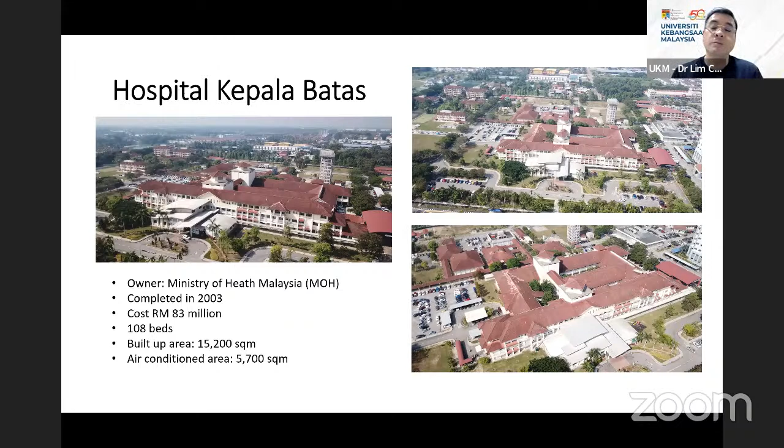The hospital can accommodate 108 beds, with a total floor area of 15,200 and an air-conditioned area of 5,700 square meters. The majority of hospitals in Malaysia are naturally ventilated. Of course, they have certain air-conditioned areas, but mostly for the clinics and offices. Most of the hospital wards are naturally ventilated.

The main objective of this research is to identify the state of thermal comfort in the naturally ventilated government hospital. Secondly, to evaluate the improvement in thermal comfort with the proposed roof insulation, which we call a radiant barrier, and to introduce the PVT hybrid heat pump cooling system to improve thermal comfort. Thirdly, to analyze and optimize the performance and operation of the PVT hybrid heat pump cooling system through field studies.

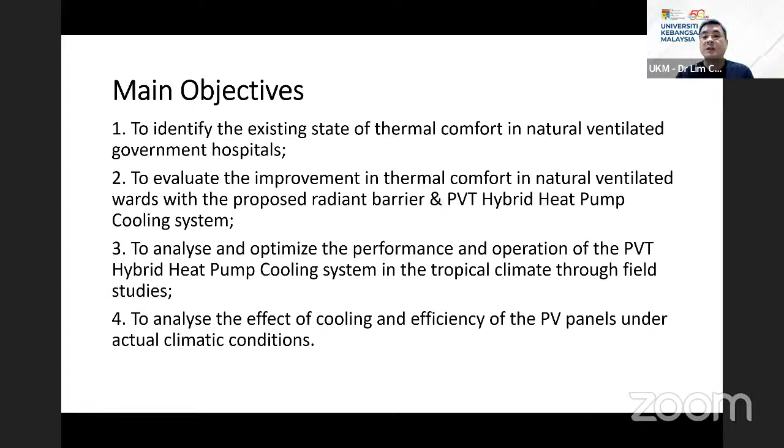And fourthly, to analyze the cooling effect and the efficiency of panels under the Malaysian local climate condition. So this is the framework of the pilot project. We first undertake the baseline, then design the PVT heat pump system, install, test and commission, and monitor and optimize the system and record the research documentation.

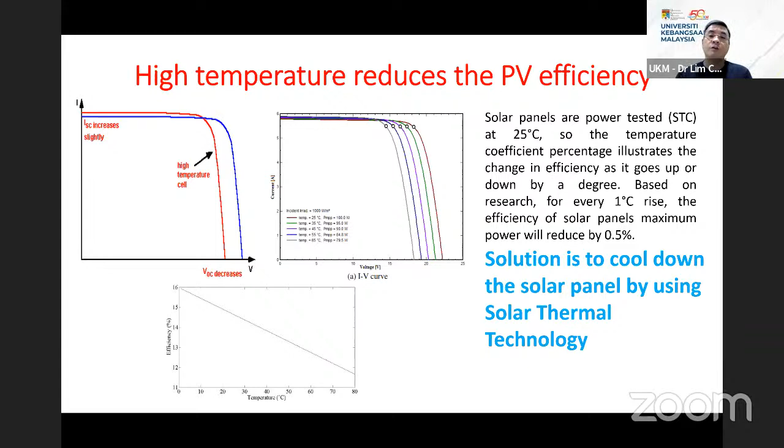The following slide shows the concept of the photovoltaic thermal. The intention of the photovoltaic thermal is to improve the efficiency of the photovoltaic panel. As you can see, if you can cool down the panel, it can improve the power efficiency of the solar panel. Based on research, every rise of 1 degree in the solar panel can reduce the efficiency by 0.5%. So if you can improve the cooling of the solar panel, you can also improve its efficiency.

So the PVT concept combines the conventional solar panel with the thermal collector. If you have a thermal collector of 60% and a solar panel of 18% efficiency, you can add them together and divide by 2, which is 39% efficiency. So you get a higher efficiency by combining the thermal collectors and the photovoltaic panels.

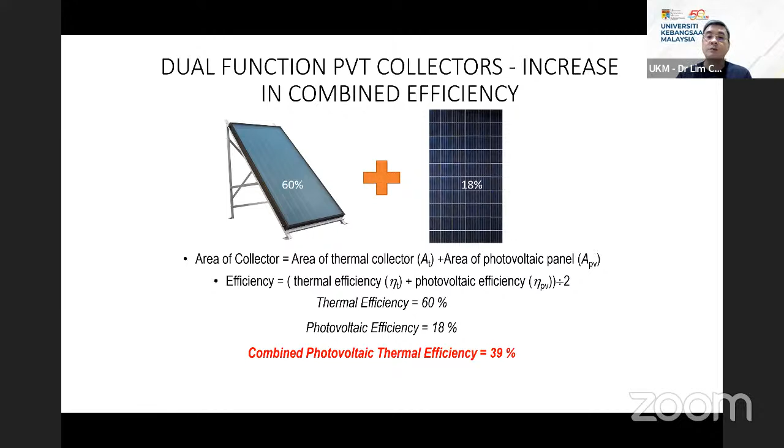So fins have been integrated into the photovoltaic panel by creating something like a channel that allows the air to flow through. The fins are something like your engine fins. If you've seen motorcycle parts, you can see the fins, which are air cooled, that enable the solar panel to cool down further by using the airflow.

There is research published by this researcher in the Case Studies in Thermal Engineering journal. They claim the panel efficiency can improve from 9.81% without cooling to 11.2% with the cooling fins. So it's quite effective. This slide shows the fins incorporated into a conventional photovoltaic panel. You have a panel of 1 meter by around 2 meters in length, and the fins are installed as a heat sink underneath the panel.

You can see the photo on your right hand side as well. You can see the fins have been installed onto the back side of the solar panel, so it acts like a heat sink.

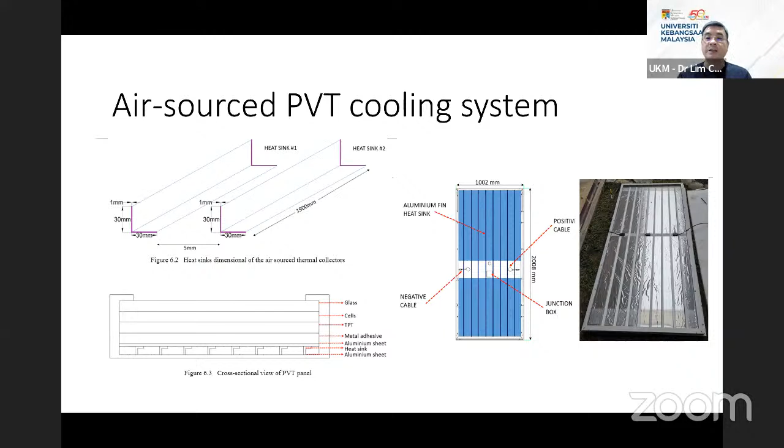Okay, so this is the diagram of the photovoltaic thermal hybrid heat pump cooling system. This chart is showing you the PVT, the photovoltaic thermal. And then this is the cooling ward, and then you have a heat pump here. So the air is channeled to the photovoltaic panel, cooling the panel, and then the hot air will be discharged and goes back into the heat pump.

The cool air is generated through the heat pump and then channeled into the cooling ward. At the same time, the heat pump will produce hot water. The hot water will then be channeled into a hot water tank, which is around 600 liters, and then the hot water can be supplied to the application of the hospital. The other way, the cold water can come in as well and be channeled into the heat pump. So this is the whole entire PVT hybrid heat pump cooling system.

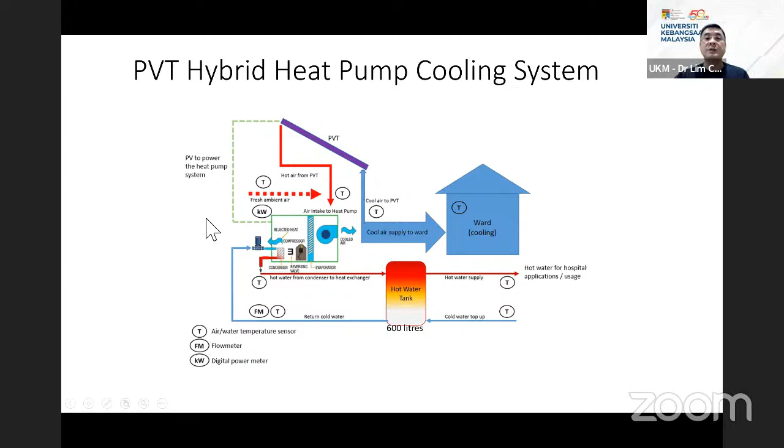The heat pump is an air source heat pump that we are using. It has a cooling capacity of 16.5 kilowatt, which is 4.7 ton, with a COP of 4, which is quite efficient.

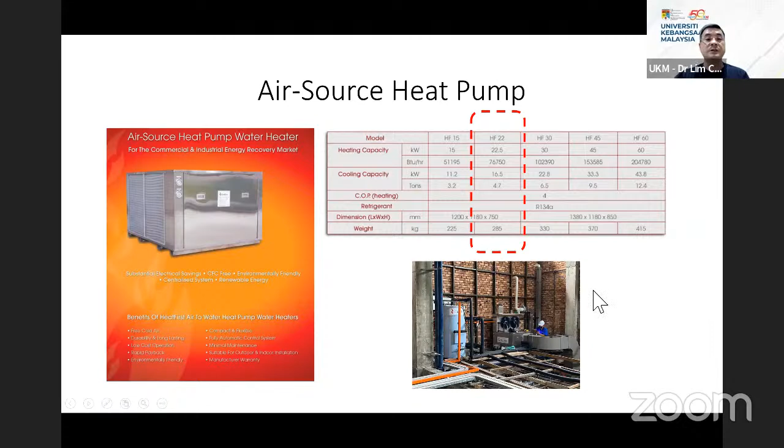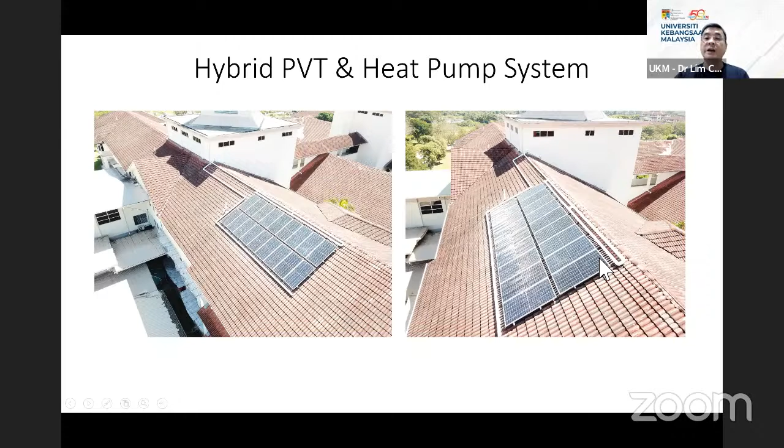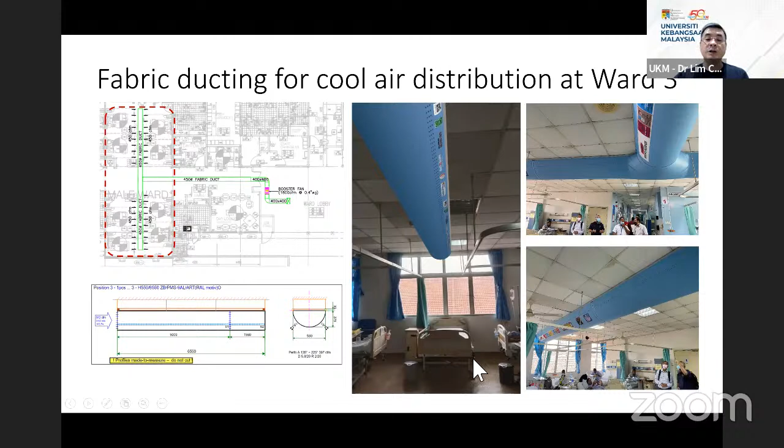We are using the fabric duct that has been installed and runs across the hospital ward, and this fabric duct discharges the cool air into the ward environment. The photovoltaic panels that we use for this project are 8 kilowatt solar panels manufactured by Jinko Solar. Jinko Solar is one of our collaborators in this research.

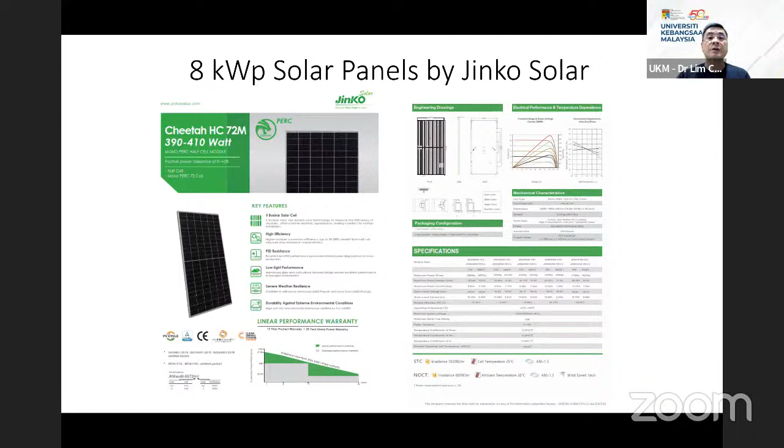A bit on the fundamentals of the thermal comfort study. Thermal comfort is based on 6 parameters, under the standard ASHRAE 55 thermal sensation. The 6 parameters are the airspeed, the air temperature, the radiant temperature, the metabolic rate, the clothing insulation, and the humidity. All these parameters influence human comfort.

For the thermal sensation, if you look at the chart on your right hand side, 0 is neutral, +3 is hot and -3 is cold. So this is the gauge for the thermal comfort, based on the studies.

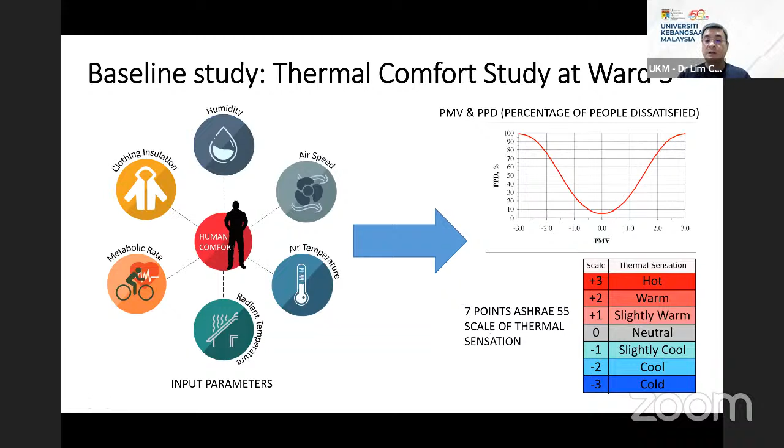This slide shows the equipment that we use to study the baseline thermal comfort. This is the thermal microclimate instrument that we fixed in the hospital ward. It can measure the air velocity, the mean radiant temperature, the air temperature, and humidity. The instrument can also plot out the thermal comfort range. This is a picture of us fixing the instrument in the hospital ward.

Okay, this is a picture of the doctors that are also in charge of these hospitals, and the researchers as well.

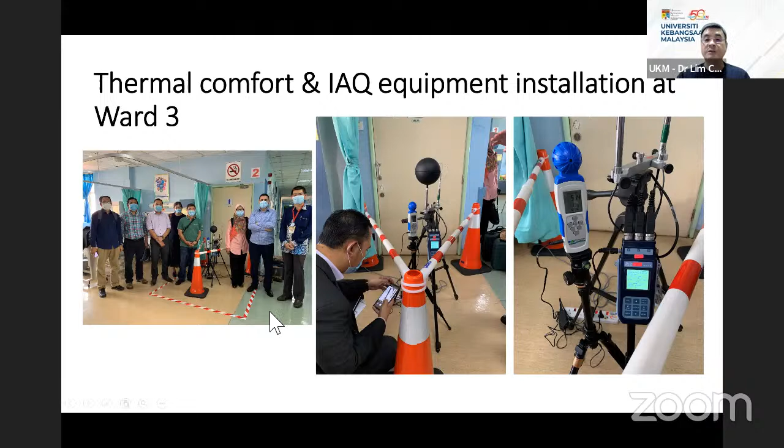Another instrument that we fixed is for the indoor air quality study. This is a TVOC, or Total Volatile Organic Compound measurement instrument, to measure the total volatile organic compounds of the hospital ward. This is also quite important to see how the indoor air quality of the ward is.

The TVOC levels that we measure have a range: 0 to 14 ppm is low pollution, 15 to 34 ppm is moderate pollution, and 35 to 50 is high pollution. There are 5 main gases measured by the equipment: toluene, ammonia, ethanol, H2S, and hydrogen.

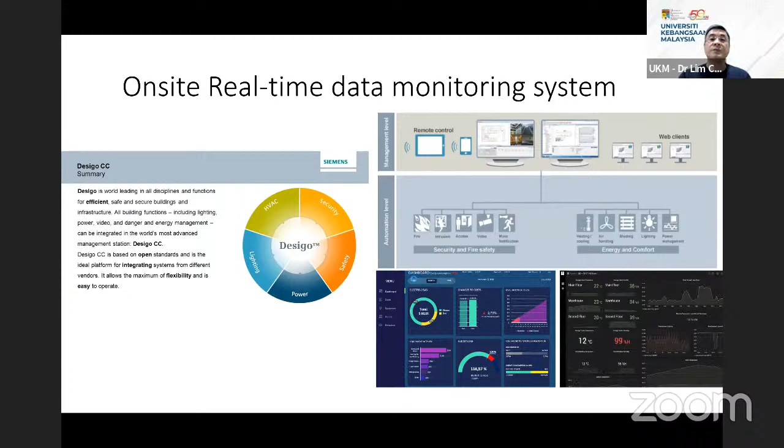We also monitor all the data collected and channel it into a real-time monitoring system. This system we installed is a Siemens system called Desigo CC. You're able to monitor the performance of the ward. This is a photo of the sensors, and the monitoring is connected to a PC on site. The sensor is fixed on top of the ceiling, and we also have a climate measurement for temperature and humidity.

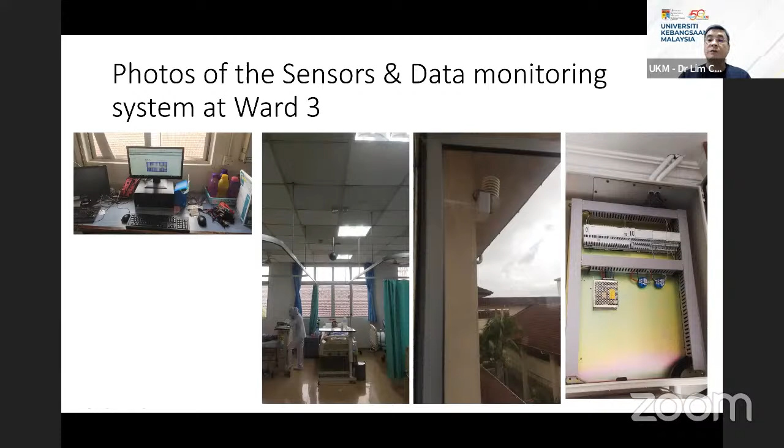The next slide I will show is the baseline existing thermal comfort and air quality condition at Ward 3.

This graph shows the condition of the indoor ambient temperature versus the humidity. You can see that the temperature increases and the RH drops around 9 a.m. and remain at 60% until 5 p.m. The lowest RH is from 1 p.m. to 5 p.m. Average RH we found is around 75%. The highest temperature is 32 degrees around 4 p.m., and the lowest is 27 degrees early in the morning. So this is the condition of the ambient temperature and RH.

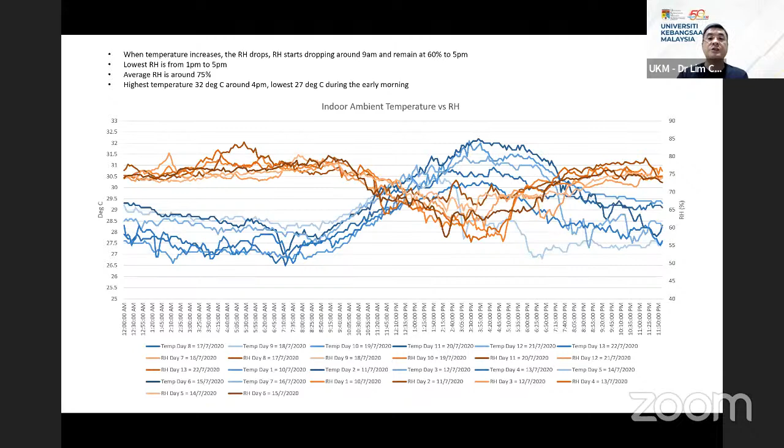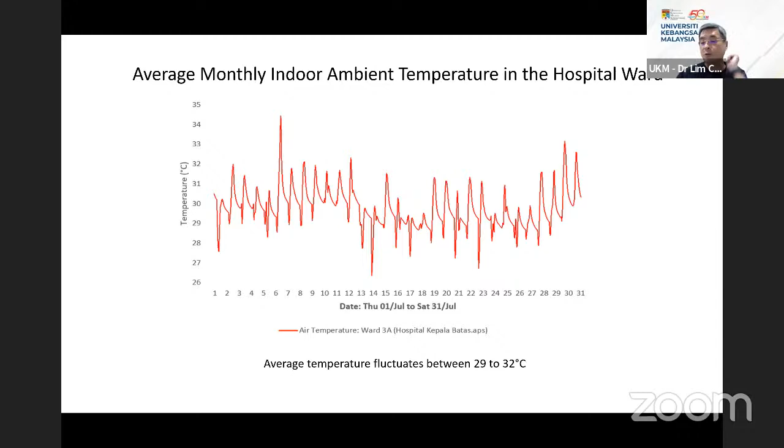This is the graph showing the average indoor ambient temperature. It fluctuates between 29 to 32 degrees Celsius, so it's quite a warm indoor environment.

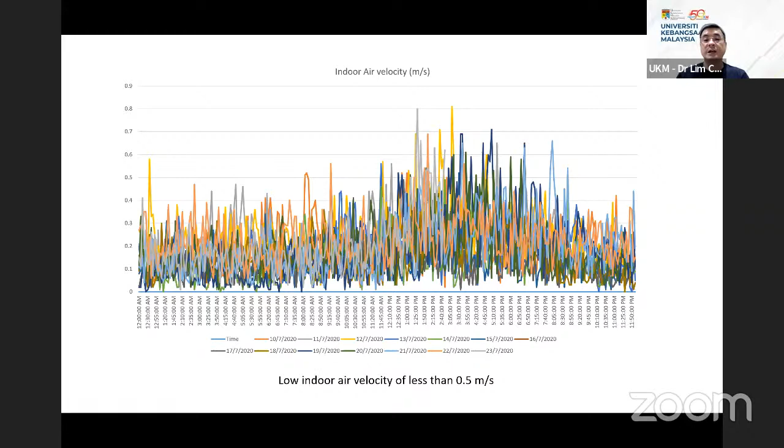This is the graph showing the indoor air velocity that we have taken through the hospital ward. You can see that most of the airflow is quite low, less than 0.5 meters per second.

This graph shows the PMV, or predicted mean vote, which is the thermal comfort. It ranges between 1 to 2.5. So if it's 1 to 2.5, it shows that it's on the warm side. This is based on a MET of 1.15 and a clothing index of 0.7.

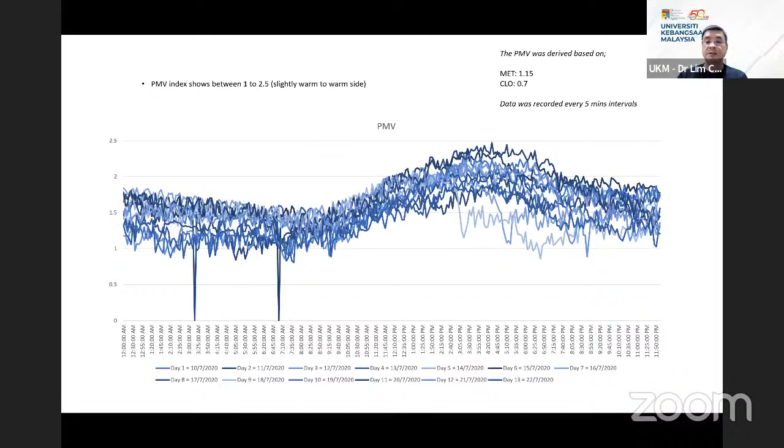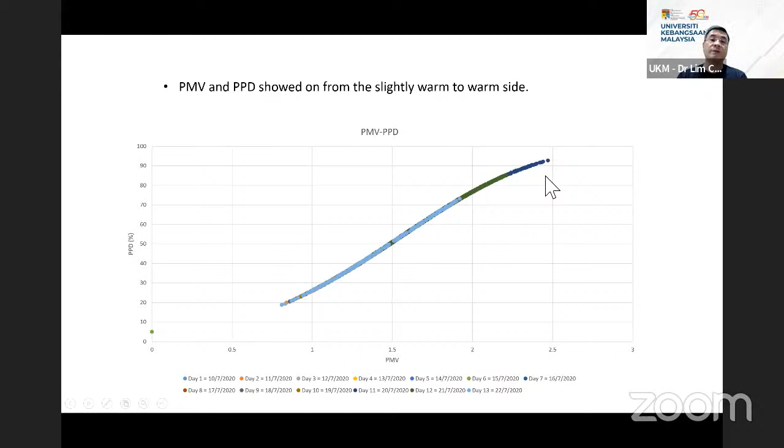The data is recorded every 5 minute interval. This graph shows the plot of PMV versus PPD. PMV is the predicted mean vote, and PPD is the percentage of people dissatisfied. You can see that it's on the warm side. 0 is neutral, 1 is already warm, and it goes up to almost 2.5, which is quite uncomfortable for the patients. This is the average mean of the PMV and PPD, showing it's between 1.3 to 2.2.

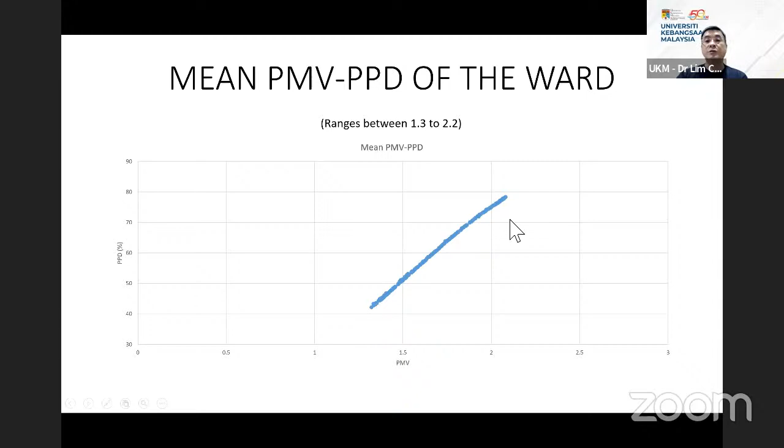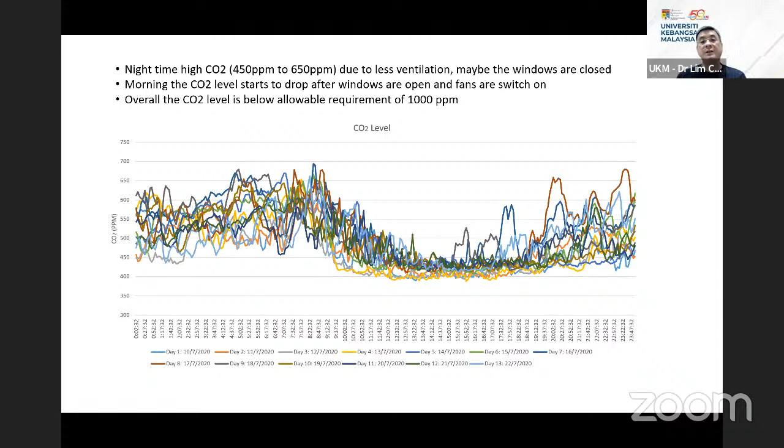On the CO2 level that we also measured, the nighttime CO2 level is between 450 ppm to 650 ppm. This is mostly due to the windows being closed during the night, because the nurses close the windows, so there's no fresh air coming in and the CO2 level increases. But in the morning, the CO2 level drops because the windows are opened and the fans are switched on, so CO2 drops to almost 400. Overall, the CO2 level is still acceptable, still below 1000 ppm, which is the safety level.

Besides that, we also did a survey on the ward occupants, covering patients, visitors, nurses, doctors, and hospital workers, to see what the perception of these occupants in the ward is.

The results from the survey at the ward: we have patients around 24% who answered, visitors 12%, nurses 52%, doctors 8%, and hospital workers 4%, making up the total respondents of the survey. We found out that 85.2% of the people in the ward felt warm to hot, which is not so healthy.

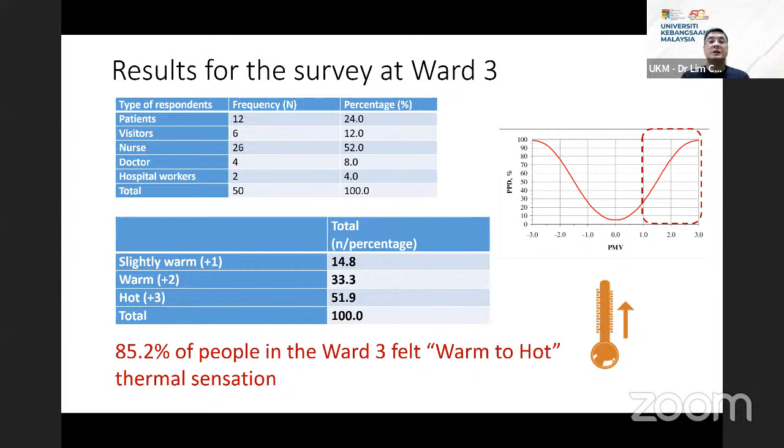So we decided to install the hybrid PVT system and heat pump for this naturally ventilated ward to improve the thermal comfort.

Okay, so this graph shows before and after the installation of the hybrid system. The blue line is without the system, and the orange one is after we install the system. So we have an improvement of 2 to 3 degrees Celsius in temperature. It's a significant improvement after fixing the system to cool down the hospital ventilated ward.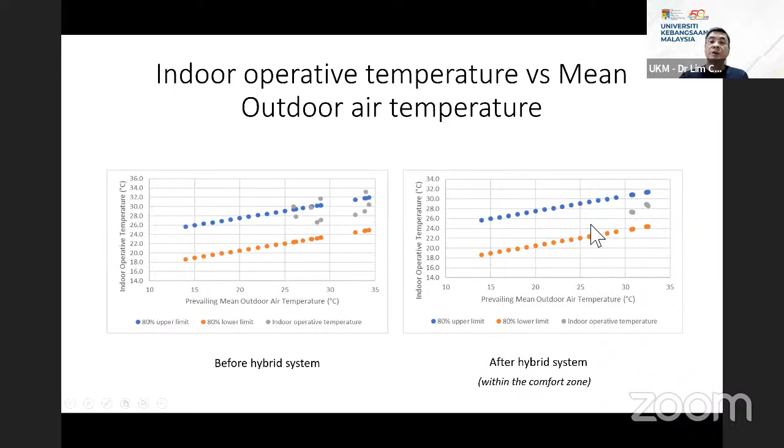Besides putting in the system, we also put up what we call a radiant barrier. It's actually a passive system, where we fix this reflective insulation, sometimes known as a radiant barrier, onto the roof of the hospital ward. This will also reduce the heat gain coming in through the roof into the hospital ward.

From the roof temperature, we can see a reduction of almost 7 degrees Celsius in the attic. And the heat flux reduction is almost 80%, which is quite significant.

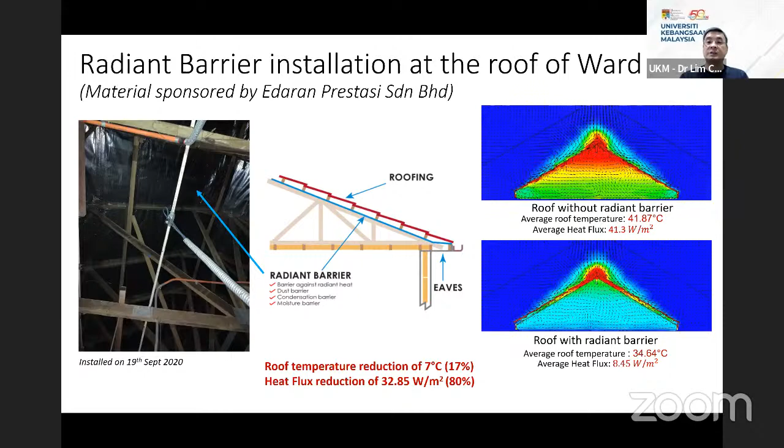Can you see the slides? Okay, so I think that's about all of my presentation. So I pass back to Miss Monica.

Thank you, Dr. Lim, for the comprehensive presentation. It's interesting to know the detail behind the environmental and comfort impact, but I'm more curious about how you managed to do that. So let's put it for our discussion later.

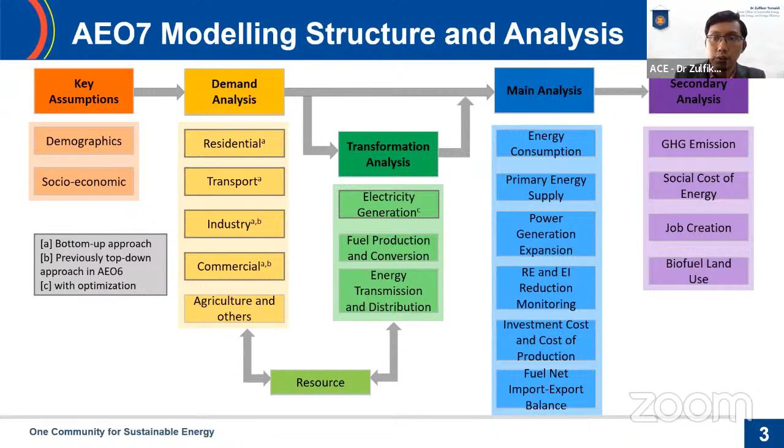Next slide, please. Just a brief overview that there are various pathways of energy systems in the future. I have to remind that this is just one of the various pathways possible in the future. But our baseline scenario showed that at least 4 times the primary energy is required for the regions to supply their economic growth and population growth.

But with the strength of energy efficiency efforts and diversification of energy, we can reduce this primary energy requirement up to 2.7 times. I think it's a very huge improvement. And with the LCO scenario, we can reduce it further until 2.5 times between 2020 to 2050.

We noted that our scenarios showed fossil fuels are still leading the power system, especially, but also the end-use system from transportation, industry, and buildings. But we also noted that the share of renewable energy continued to increase, especially in the APS scenario. On the right-hand side, we can see the shift of the fuel.

Between the baseline, the national target, and the regional target scenario, we see that geothermal, solar, and wind continue to increase along with biomass and other fuels. But in the cost optimization scenario, we noticed renewables reduced along with natural gas due to its current pricing, replaced with coal, biomass, and nuclear. Next slide, please.

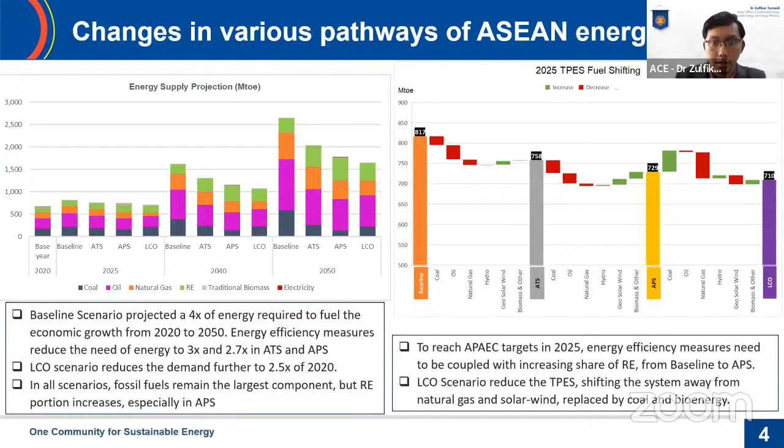As I promised in the beginning, this is the status and projections of the regional target in terms of renewable energy. In terms of installed capacity, the region has achieved very good progress, especially in the last 2 years, increasing its renewable energy share up to 33.3%. With the target of reaching 35% by 2025, we noted that even with national targets, without additional efforts, we can reach up to 37.9% of renewable energy share in 2025, quite high above the target of 35%.

But with more policies and more measures, we can also achieve this number up to 41% in 2025, and at most 63% of renewable energy share can be available for installed capacity in 2050.

Meanwhile, in the share of renewable energy in primary energy supply, which includes both electricity and the final sector, we see that the national target will give us 17.5% of renewable energy share in primary energy supply, which has a gap for the target of 23% in 2025. We noted that it needs a huge effort. If you see the purple line here, we need a strong change of trend from the past so that we can reach this 23% of renewable energy share in primary energy supply. Next slide, please.

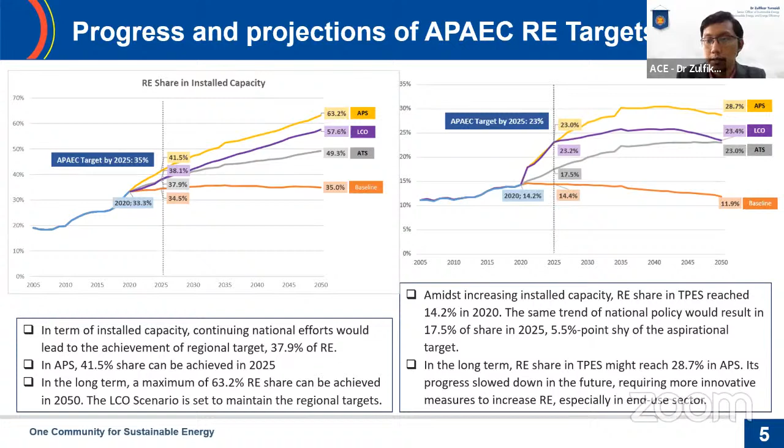In terms of electricity generation system, as I noted, the renewable energy share will continue to increase, especially in the regional target scenario or the APS. The solar itself will increase up to 94 gigawatts in the APS in 2050, around 13% of the share of the installed capacity at the time. And the same also with other sources, hydro, geothermal.

And then in terms of investment, we noted that the APS actually also reduced the investment compared to the baseline because of the efforts in energy efficiency measures. So we need less energy to produce the same level of economic growth. But then we noted that in terms of optimization of power system, the investment of the LCO is lower, and that's partly because of the huge additions of coal installed capacity instead of the other alternative, which is currently cheap.

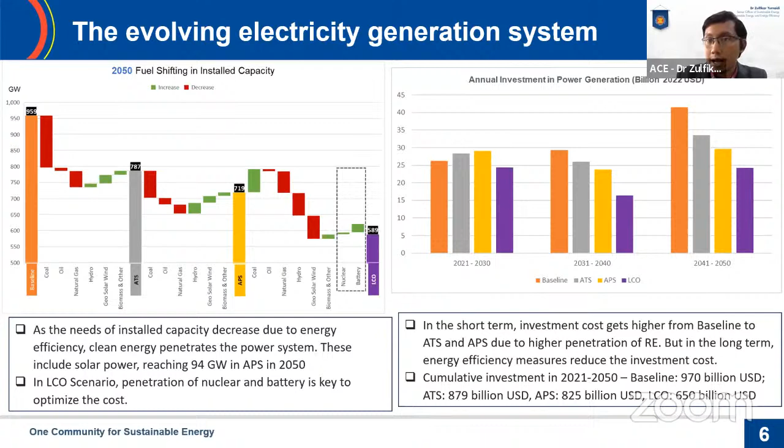So the highlight here is that homeworks are still there for the renewable energy system, including solar, so that it can compete with conventional power in terms of overall cost, especially in the Southeast Asia region, in which the cost of generation for solar is still marginally higher compared to the other regions in the world.

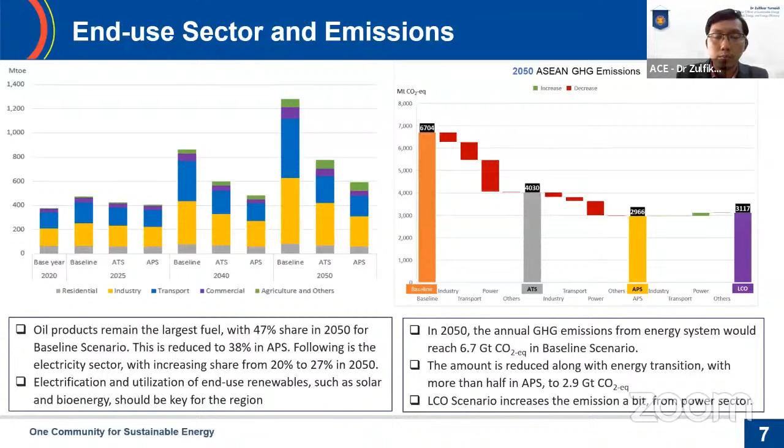But in terms of policy recommendations, first I would like to note that we need accelerated efforts for the region to achieve the targets in renewable energy and total primary energy supply, while the region is projected to go beyond its regional targets in terms of installed capacity by 2.9%. And this shows that beyond the power sector, we also need to improve our renewable energy penetration in the end use sectors, including in buildings.

We also noted that beyond the capacity, renewables need to contribute more to the power generation mix. Meaning that, as we know, renewable energy such as solar and wind has an issue in terms of intermittency. This variable renewable energy then needs to be coupled with storage systems, a stronger grid system, interconnection, so that we can optimize this capacity to produce more generation. In other words, we need measures to increase the capacity factor of this variable renewable energy, especially solar, because we have a huge potential in the region.

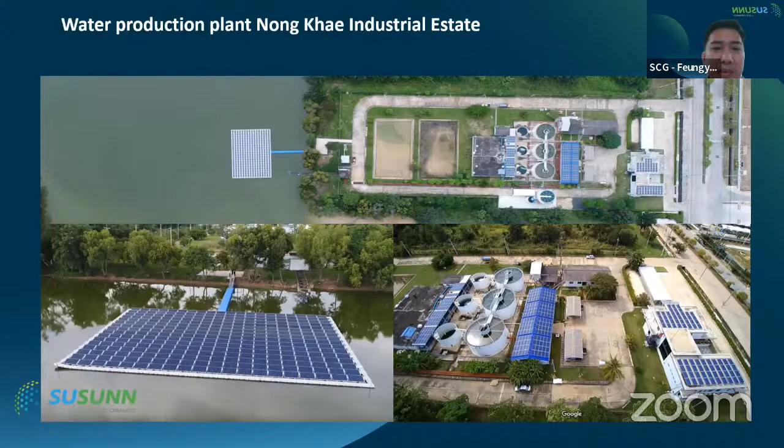For the water production plant at the Nong Khae, we install in 4 areas. The first is the A area. The A area is the floating solar system. The installed capacity is 80 kilowatt. The B area is installed on the metal sheet, the solar roof, for 20 kilowatt.

And the C area is installed on the solar roof of the asbestos cement corrugated roof type. And the next one, in the D area, we install the solar system on the concrete flat roof. We compare all the systems for the efficiency of solar systems installed on floating, on the metal sheet roof type, on the asbestos cement type, and the last one compared with the concrete flat roof type.

Next. This is the result from the output after we install. For the floating, we have the specific output energy compared with the installed capacity. The floating has more efficiency because the floating has a low temperature compared with the roof. You can see the result, 4.1 kilowatt hour per kilowatt capacity per day. This is more than the rooftop by about 9%.

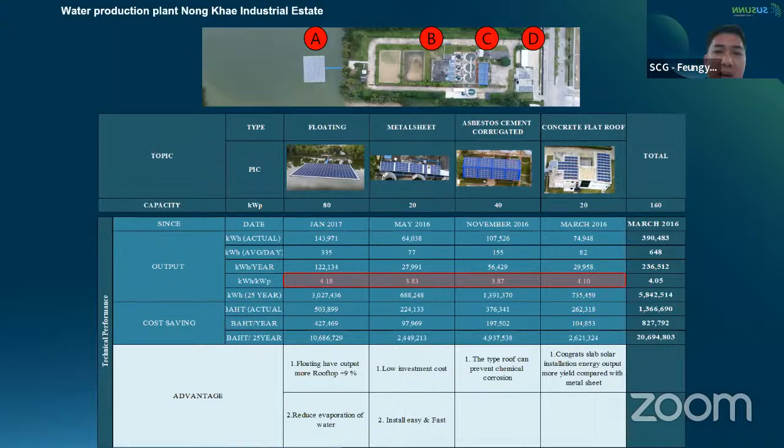Yes. And the next one you can see is the concrete flat roof. The concrete flat roof has more specific energy. This is 4.1 for the energy output. Okay.

After that, we compare the payback periods. In the payback periods, the floating takes more time compared with the other types, but has more efficiency, because the floating has more investment cost for the HDPE pontoon. Yes, and you can see the B area installed on the metal sheet, the efficiency is low, but the payback is fast compared with the floating.

Installed on the metal sheet roof and asbestos cement, it's about 5.1 or 5.2 years for the payback period, and the floating 6.5 years. Yes, for the result of reduced energy consumption, the water plant can reduce energy by about 14%. Yes. Okay, the next.

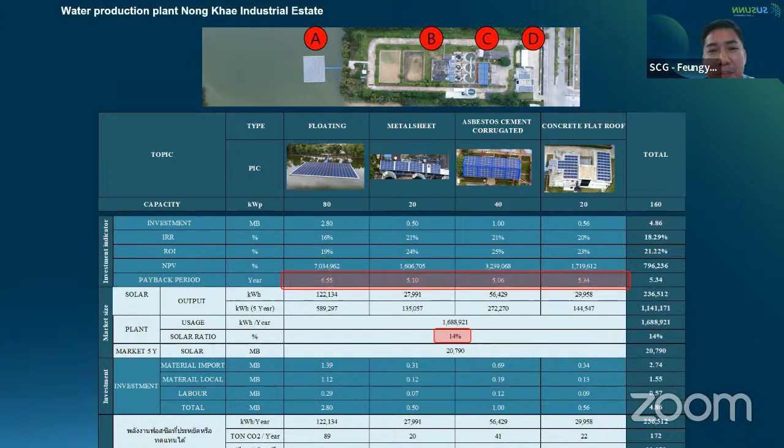This was a very long time ago for this project, around 8 years ago. Now we have a new project to compare the technology again for the solar farm with bifacial and tracker technology. Okay, next. This is a new project for the SUSUNN Smart Solution. You can look at the overview. This has a total capacity of 2.1 megawatt. The A area is the inverter station, the B area is the front gate, the C area is the cleaning system, and the last one, D, is the monitoring system and weather station.

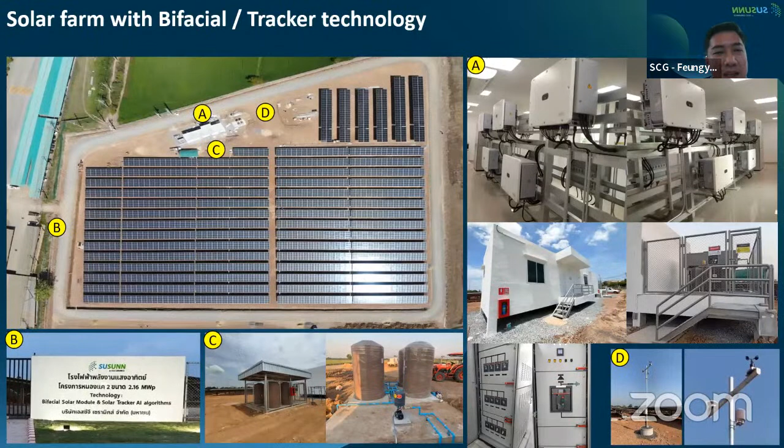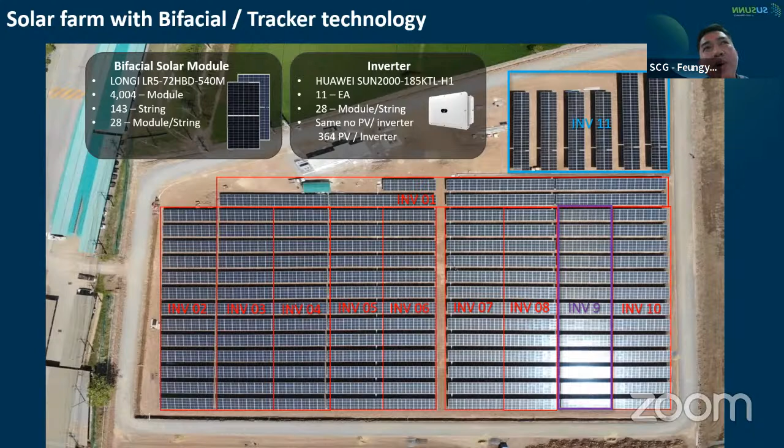Okay, the next. This plant has 11 inverters, and for every inverter the PV panels we install are the same, 364 PV for one inverter. For inverter 9, we install the monofacial, and inverter 11 we install the tracker system, and the other inverters in the red area we install the bifacial, because we want to compare the technology of the bifacial module, the monofacial module and the tracker. How about the efficiency? Okay, the next slide, the result.

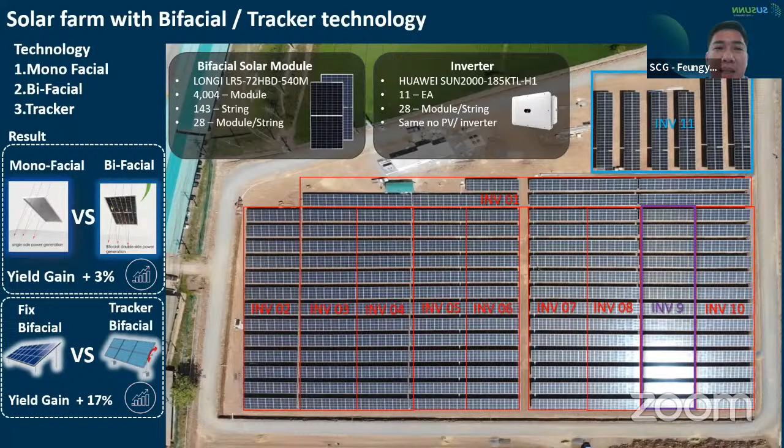The result after we compare the technology monofacial, bifacial and tracker: the monofacial compared with the bifacial at fixed mounting, the bifacial gains more than 3% compared with the monofacial. And the tracker has more efficiency, more output compared to the fixed mounting system, around 17%. Okay, this is the result of our plant. Yes. The next, the total plant. This can save around 11 million baht per year, and can reduce carbon by 1,620 tons.

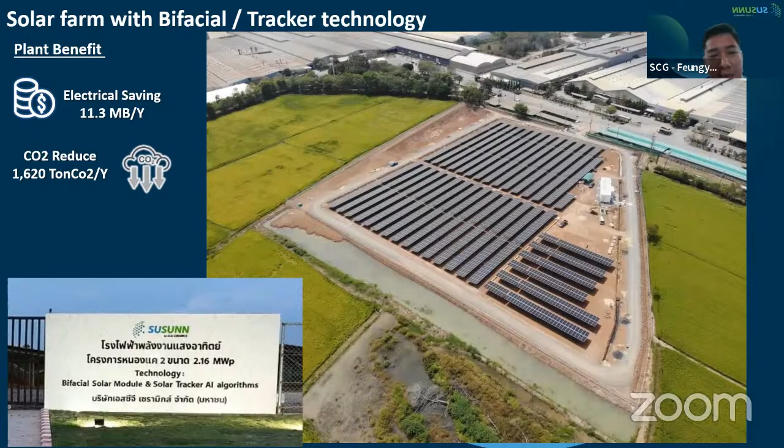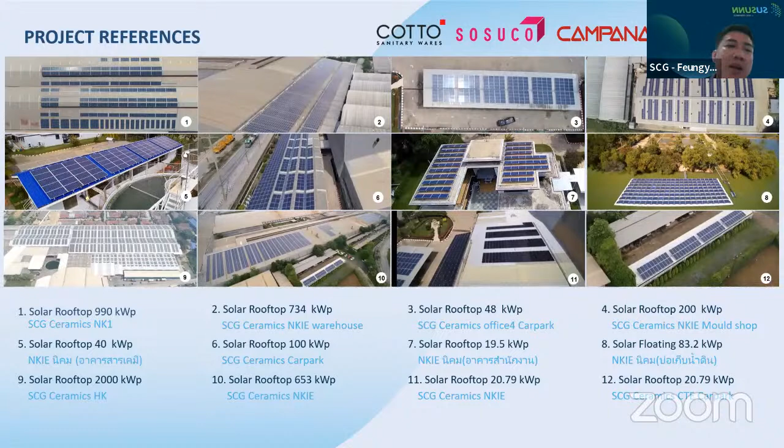This is the example for the project for installing solar. Okay, the next. This is the reference for the rooftop only. Okay, and this is the solar floating after we finished installing in the Nong Khae industrial estate. We have one big project for solar floating, 1 megawatt. You can see in the picture. Now it has already operated for about 4 years.

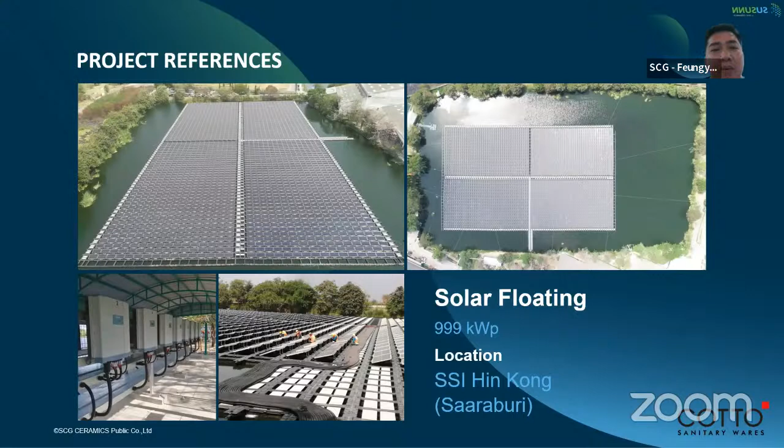Okay, the next. This is the farm also, 8.7, in the center of Thailand. This is the big one. The next.

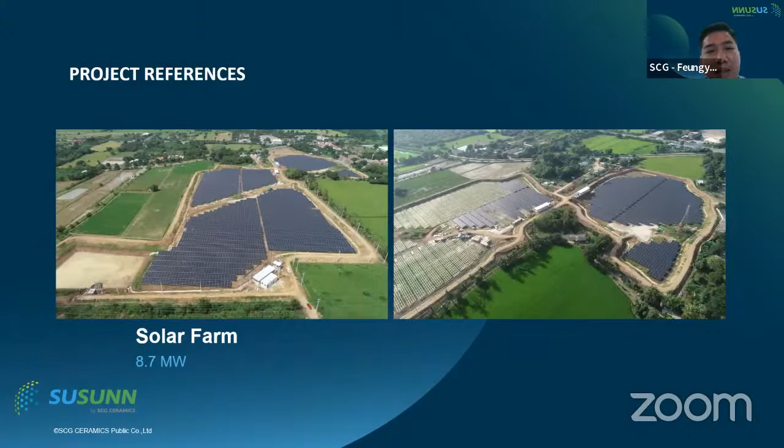And this is the solution for the carport. If you have a plan to install a carport, don't use metal sheet for the roof. You can use the solar panel to replace the roof. You can see the picture. It doesn't have a roof, but uses the solar panel for the carport.

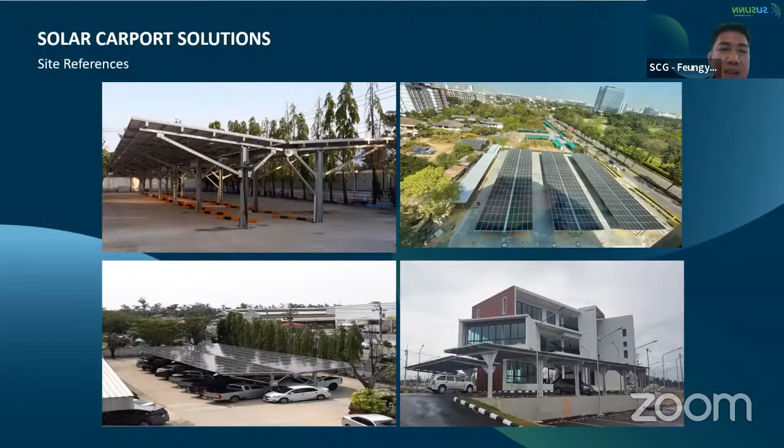Okay. And the last one, I will share another solution for the solar system that SUSUNN implements. Okay, the next. And SUSUNN has an application for monitoring the solar system. The application can show the monitoring for the inverter brand. You can download it on iOS or Android, right?

Okay, thank you. And the next one is the monitoring solution, which can monitor on the website and get more information from the inverter, and has the feature to compare the efficiency. This is implemented by our team to check the solar system and check the efficiency of the system.

Okay, the next. This is one solution for energy trading and carbon trading. In the future, if you have the area to install solar, you can sell the electricity to another place through the platform. Yes, now there is a sandbox in Thailand to implement this system. Okay, the next one.

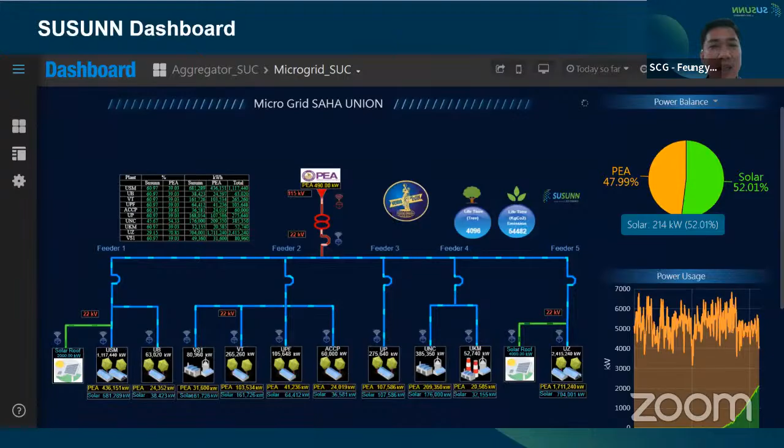Okay, thank you, Mr. Feungyot, for the insightful innovation and also the many projects dealing with solar PV application in the industrial estate. I would like to point out that SCG Ceramic is also working a lot on the bio-circular economy in cooperation with the local level, doing CSR projects with a lot of communities. So they have done a lot of projects at the community level.

So, moving on to the next speaker. I would like to invite Mr. Kong Ching Yu, the solar project financing director from Chongho Bridge. He is working with Chongho Bridge, which is China's largest rural inclusive financial institution. They specialize in supporting small and micro scale businesses in rural areas of China, in over 10,000 villages. And he will give you an insight on how solar PV fights against the poverty problem in China. So if things are ready, the floor is yours.

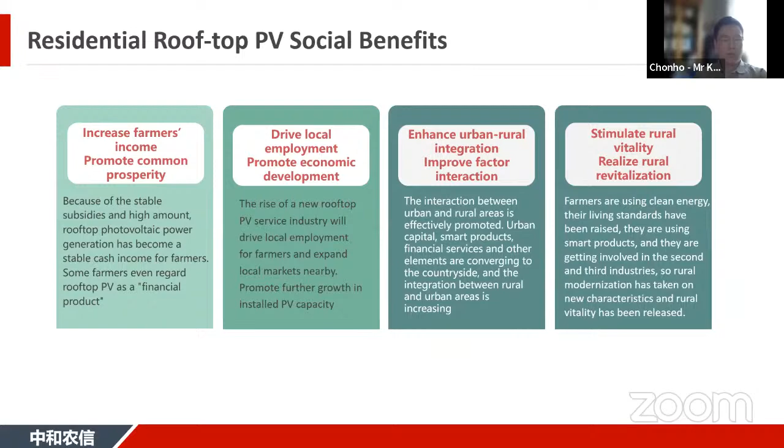So before we determined to enter into this area, the first question was, is China's policy today friendly for rooftop PV? And we found out the answer was very positive. The National Development and Reform Commission issued a document to encourage the acceleration of the development of PV and wind power, and at the same time, to promote the development of energy digitalization and intelligence, and accelerate the level of intelligence of the energy industry chain.

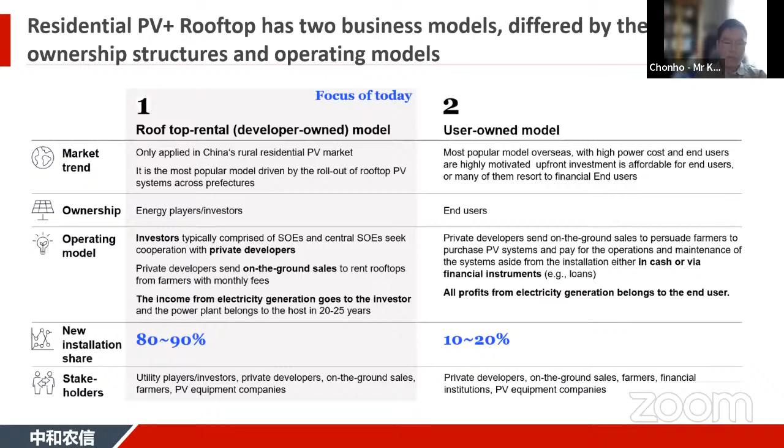So there are three general ways for market players to participate in the value chain of residential solar PV. In descending order of the depth of involvement in the entire value chain, they are independent development, cooperative development, and EPC. We have chosen the second model based on our strengths, which I will share more details on later. And we do believe that many entities can combine their strengths and participate in the value chain of household rooftop PV. In whichever model you choose, there are good benefits to be had. Next, please.

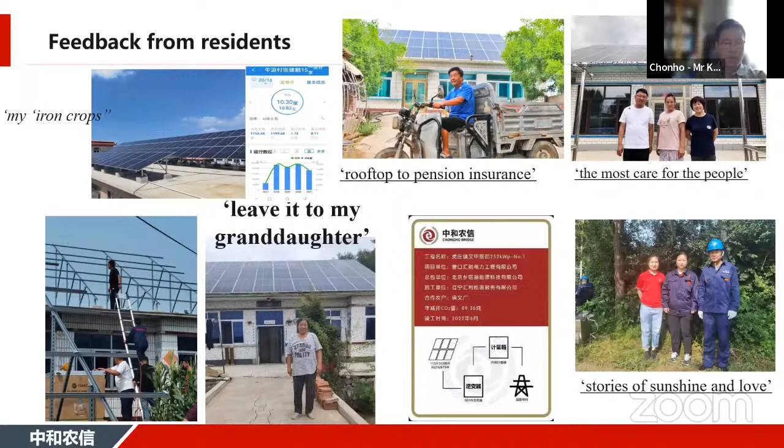And from the company side, we not only can remotely monitor the power generation of each power station through the mobile app, but also will regularly visit them on site for maintenance to ensure the interests of all stakeholders. Next, please.

So a summary of our business model experience. The first and the most important thing is to sincerely cooperate with rural residents. In other words, we need to have education and contractual spirit, and we need to give them confidence and honor. And second, we can seek support from multilateral institutions and ESG investment funds. They will have great support, not only funds, but also reputation.

And last but not least, internet thinking in operation is very important. While we have reachable offline teams, we also need to make our teams more efficient and smarter. And the technology we have today is also fully capable of supporting us to develop in this way. Next. Oh, that's all. Thanks for listening.

And I also want to summarize the rooftop rental model, which would be easier for farmers and also might be applied to the ASEAN member states to benefit their way of life. So before moving on to the panel discussion, we will now be joined by three other panelists, Mr. Praptono Adisulistomo, Mr. Gan Bunhian, and Mr. Washrin Pajian. I would like to introduce our panelists first.

Mr. Praptono Adisulistomo is the policy analyst and the coordinator of Renewable Energy Investment and Cooperation of the Ministry of Energy and Mineral Resources of Indonesia. He has more than 20 years of experience in rural electrification, clean energy development, and helped formulate a lot of the policy that deals with the energy transition in Indonesia. His education background is a master's degree in electrical engineering from the University of New South Wales and a bachelor's from the University of Gadjah Mada.